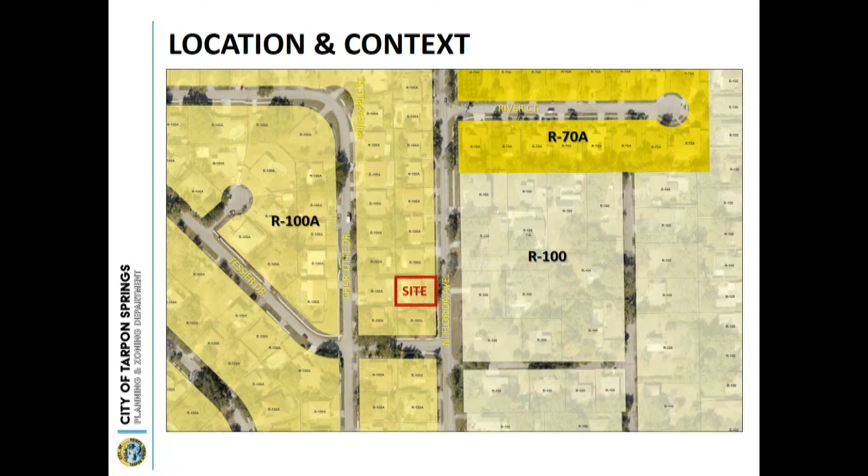The applicants are here today requesting a variance to reduce the side yard setback for a new pool screen enclosure to be installed around an existing pool that's been on the property from, we've determined, at least since 1980. They're requesting the side yard to be 2 feet from the southern property line here, whereas they'd be required to have an 8-foot side yard setback for the enclosure.

It also requires that enclosures have a minimum separation distance between the water's edge and the enclosure, and that separation distance is 3 feet. The proposed enclosure will meet the 3-foot separation distance along the rear as well as the side. In this case, the side setback requirement is 8 feet minimum for enclosure, and they're requesting a 2-foot setback along the southern property line, basically because of the existing pool's layout and location on the property.

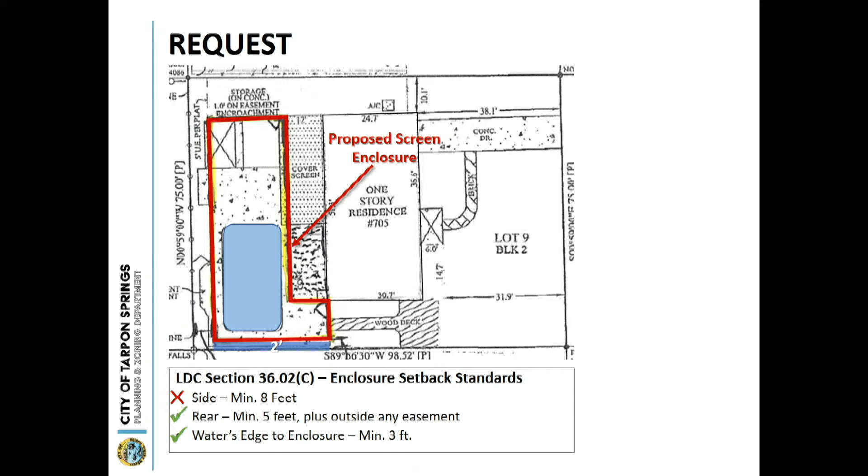Were you sworn in, sir? Okay, if you would like to come up to the podium, and if you could please state your name and address for the record. Brandon Thomas, 705 North Florida.

Is there any information you would like to present tonight that is not already included in the packet? No, she went over it very well. It's just that side setback. I wish I had the opportunity to install the pool because I wouldn't have installed it that close to the fence line. I would have centered it on my house, but unfortunately it's in that corner. I understand. Well, thank you.

If you can hold on one sec, are there any questions of the applicant? No? Okay, looks like you're free to go.

So, is there anyone in the public that would like to make any comments on this application? Seeing none, did we have anything submitted via email or mail? We did not. Okay, all right, so we're going to close public comment at this time.

And if we can have a motion? Motion to approve. Second? So we have a motion and a second. Roll call. Do you want any discussion? Thank you, ma'am. Ready? All right.

Ms. Simon? Approve. Mr. Burris? Yes. Mr. Urbowski? Yes. Ms. Turner? Yes. All right. Happy screening.

So our next application, number 22-59, is a variance to reduce the required side yard setback for a detached garage at 1503 Tessier Drive. So if we can have staff presentation, please.

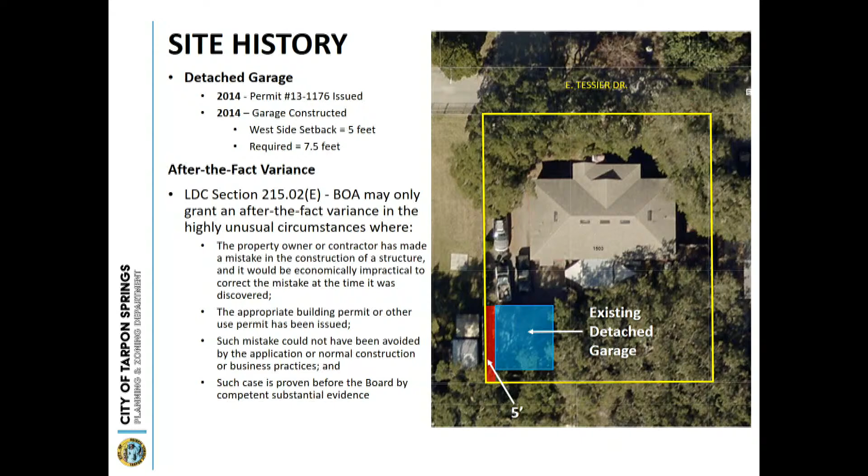The Land Development Code allows the Board of Adjustments to grant an after-the-fact variance in highly unusual circumstances when 4 criteria have been met: the property owner or contractor made a mistake in constructing a structure that would be economically impractical to correct at the time it was discovered; the appropriate building permit or other use permit has been issued; such mistake could not have been avoided by normal construction or business practices; and such case is proven before the board by competent substantial evidence.

Staff did do research on the permitting history of this property and this project. We were unable to determine the circumstances that led to the approval of the nonconformity. It essentially could have been an oversight at the time the application was reviewed initially.

The applicant did construct what was permitted and issued in their permit. We also took this application to the technical review committee, as we do with all applications, to review for any potential concerns or issues. Both the code enforcement department and the fire department went out and determined there were no safety issues with the reduced side setback or the location of the existing garage.

The Land Development Code allows reduced side and rear yard setbacks for detached garages if they meet certain size limitations. In the R100 zoning district, the maximum size allowed to get those reductions is 562.5 square feet. The existing garage is approximately 440 square feet, so it does meet those size limitations. When you meet the size limitations, you can take advantage of a rear setback of 5 feet and a side setback of 7.5 feet. If a detached garage exceeds those size limitations, then we default to the zoning district setbacks.

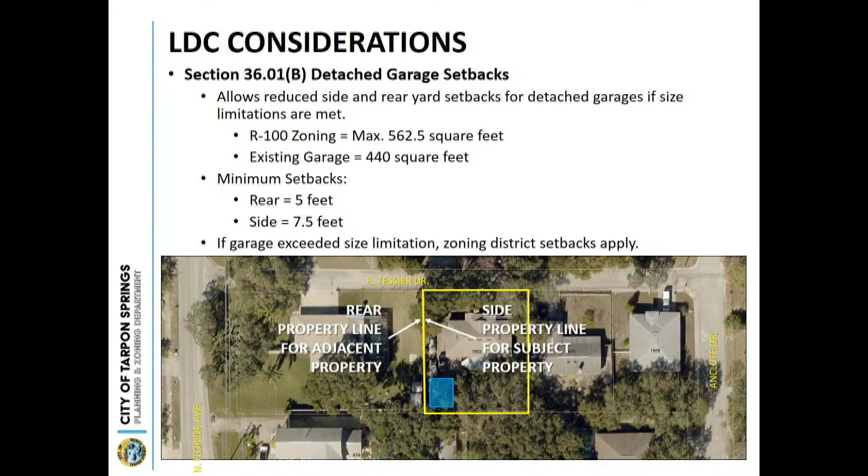I mean, just how did we get here? I understand that you had researched how it got permitted, but since it was permitted, why is it in front of our board? This originally came to our attention from a complaint to code enforcement. That's when research took place, and then we consulted with our attorneys, and they determined that to rectify the issue and to legally recognize the nonconformity, the best avenue was to go through the after-the-fact variance approval process. Again, with any variance, it's up to the board whether the evidence and criteria have been met.

Will they be using the same concrete pad? They're not building anything new. They're just requesting to recognize the existing structure on the property that has a 5-foot setback can remain. It's after the fact. Nothing new is being proposed. It was built 8 years ago. Correct.

To clarify, what was built 8 years ago, that's before us here, was built in accordance to what the permitted documents were showing, which is 5 feet side and 5 feet rear, when it really should have had 7.5 feet side. Correct. Okay, thank you for that clarification. Do we have any other questions of staff?

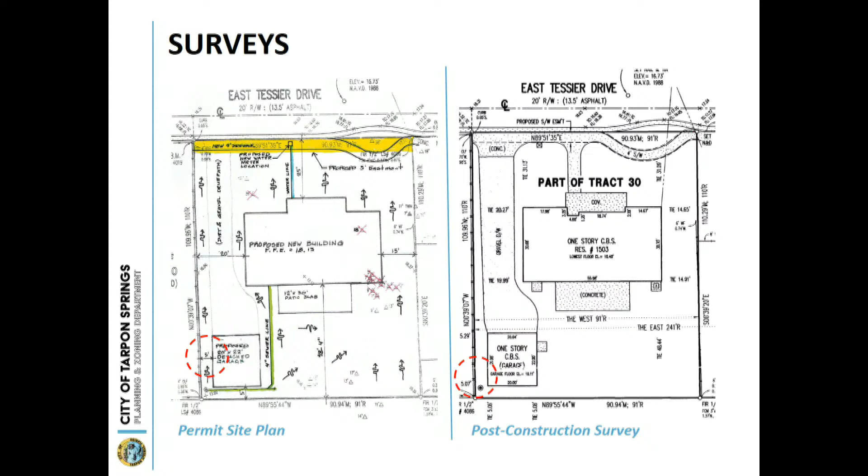Sorry, that's okay. So, well, if we can maybe go to public comment, the property owner and anyone else would be considered public comment. So if anyone would like to speak about this, please come up to the podium. And if you could please state your name and address for the record.

What brought this out is the code enforcement at my property. Joe Hamilton, 620 North Florida Avenue. What brought this to light was the code enforcement at my property over my sheds. Code enforcement came out, I moved the sheds. They said, hey, you got to move your sheds. We adhered, you got to have a 5 foot separation from the property line for the sheds. I said okay, I'll move the sheds back.

I was notified that I was in violation, so I moved the sheds back. When code enforcement was out, I said, how about the garage next door? Why are they allowed to be closer to the property line? And they're not subject to code enforcement.

It's important to understand too that the house next door is elevated, and the eave of the house is 16 inches, possibly 18. So the actual distance off the property line is closer to 3.5 feet, not 5 feet. This 5 feet is to the foundation.

So that's my question. Why is that property not subject to code enforcement as I have been?

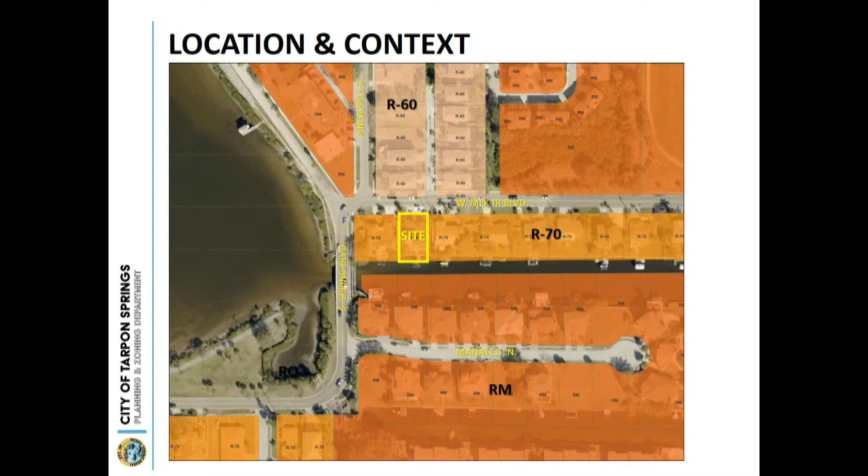Yes. Okay, this property is located on the south side of West Martin Luther King Jr. Boulevard, not Drive, outlined here in yellow. The property itself is zoned R70, which is a 1 and 2 family residential zoning district. There's multifamily zoning to the south of the property, and then R60, 1 and 2 family zoning to the north.

The applicants are here today requesting a variance to allow an existing driveway to be replaced and widened beyond what is allowed by the Land Development Code. As you may recall, back in April the applicant came before us to request a similar variance, and the board did deny that request. They have since revised their application, reduced the size requested, and submitted the current variance you see today. They are proposing a total width for the circular driveway of 37.5 feet, where the maximum allowed is 23 feet. For reference, the previous request was for 45.5 feet total width, so this is a difference of 8 feet.

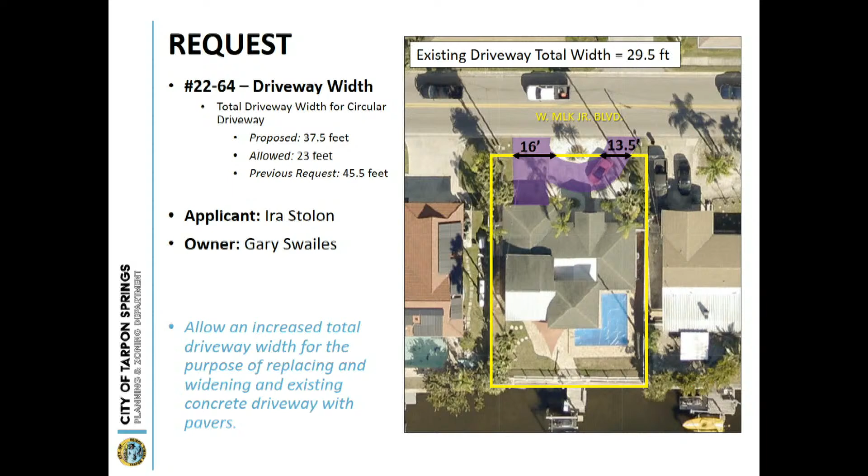Just as a reminder, the width of the driveway is measured at the property line. The Land Development Code states that the maximum total driveway width measured at the property line shall not exceed 33% of the lot width or 28 feet, whichever is less. This property has a width of 70 feet, which allows them to have a maximum of 23 feet for a driveway. The existing driveway is currently non-conforming, and it is 29.5 feet in width.

Looking at some considerations for the Land Development Code as well as the context of the area, this property does meet the minimum lot area, width, and depth requirements for the R70 district, so it is a conforming lot of record. The existing home also meets and exceeds the minimum front setback requirement, which is 25 feet.

It's a good question. Excuse me, Ira, because it's a valid question. I'll pull in to where my garage is, on the 20-foot section, I'll pull up, I'll be able to get my truck around, which it won't go around that driveway. I've got to do 3-4 point turns, then I'm back in.

So the key for you, excuse me, is that by widening the center island, you'll be able to back up the truck and come around the circle to be able to get out. Is that what you're telling me, sir? Yes, sir. Okay, the car that you have parked on the left, where will it be parked?

That car that you have in your driveway? That's my neighbor's car. I don't have, oh no, that's an old picture. That was a renter I had there. That's not my car. So the truck is the only vehicle that's on the driveway?

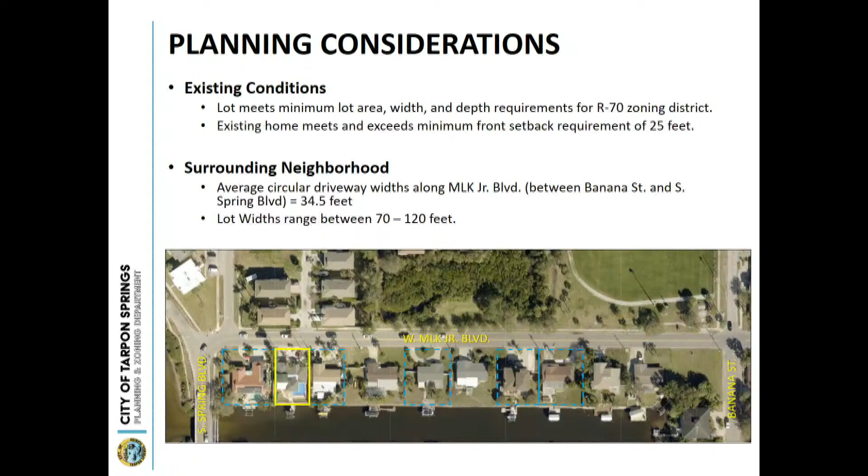Well, but then if someone comes to live with me or someone else... but you know what? I know where you're going with that. I'm not going anywhere, I'm just asking the question. Okay, very well. I need that whole driveway, so the thought of anyone moving in, I don't want anyone to move in, so I'll be able to use my driveway.

Can I ask a question of the city? The bushes that are on the first house by the stop sign, is there any city ordinance on this?

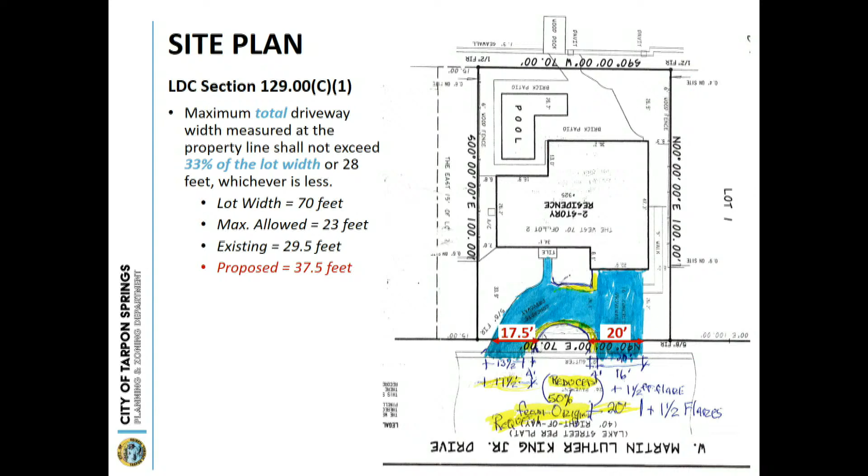So we do have sight visibility requirements. I have to see if I have a good picture. You're talking about here? Yes. So there are sight visibility triangle requirements in our code, and at intersections, it basically measures a distance of 30 feet in either direction to create a triangle. I can't speak to whether or not those bushes fall within that sight visibility triangle or not.

That's something that typically, if we had information, we would refer it to code enforcement. They go out and verify to see if it's an issue. It may not necessarily be in our measured sight visibility triangle, but it still potentially could create a visibility issue. But those are the requirements of the code.

He may have valid points with the stop sign and all that, and I know they run fast around there. But if the city has an ordinance on this, then his problem is solved. He doesn't need to widen the driveway.

Madam Chair, might I ask a few questions to make a clarification, please? Yes.

Does a paver driveway need to go through the permitting process? Yes. Do you know if they check sight visibility with the driveway aprons during the permitting process? So we would check the existing driveway with what's around it. We wouldn't necessarily go to the adjacent property and check the intersection.

Okay, so presumably when this driveway was installed, that was taken into account? If it was installed under the regulations at the time, under the permitting, yeah.